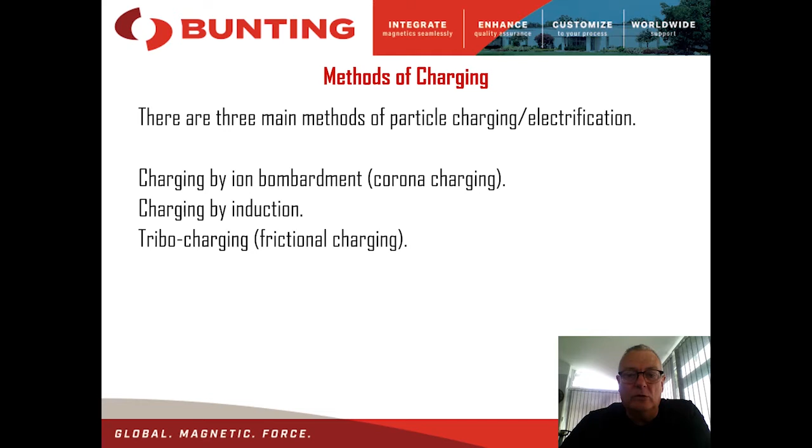Corona charging is induced onto particles in the separator by the use of an electrode, as we see here. That electrode is either positively or negatively charged. In this case, we tend to use positive ions to charge a particle as it comes into the separation area.

So we have positive ions charging our particle, which could be a conductor or a non-conductor, and that particle is carried into the separating area on an earthed roll type unit in this case. The surface of the roll itself is earthed, which allows a separation to be achieved.

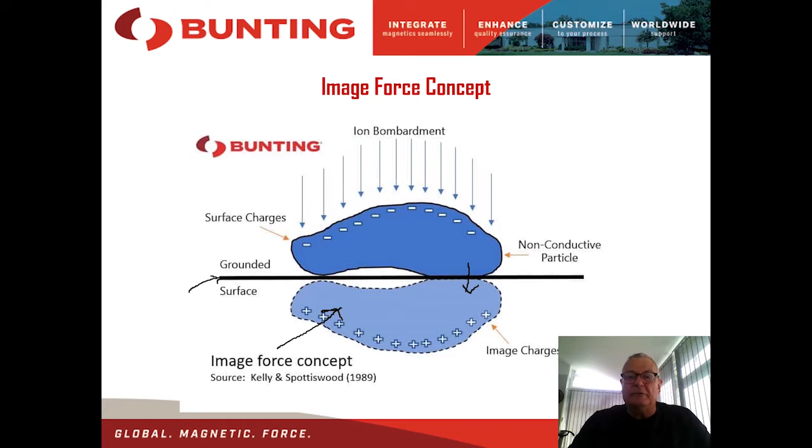That image force is defined by the charge we put on this electrode, and also the conductivity of the particular mineral we're processing. So if it has a low conductivity, the image force will be high, meaning it sticks to the surface all the way around and will be removed by a brush at this point.

If it's a conductor like aluminium or copper, it will instantly lose its charge and be thrown off by the centrifugal force generated by passing over the roll, a function of its mass, its velocity squared, and the radius of the roll. So it's a balance of those forces that allows us to separate a conductor from a non-conducting particle.

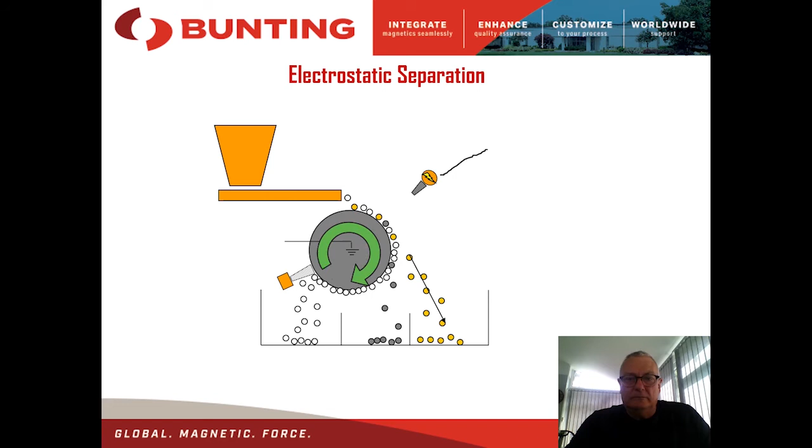So if we look at electrostatic separation in animation, we have our corona electrode here, which will be running at 20 to 30 keV. So it's high voltage, very, very low current.

We feed our material on by a vibratory feeder. The material falls on the roll. I can control the roll speed. The roll is earthed through the bearings.

The yellow particles are conductors, which may be aluminium or copper. We have a middlings fraction here, which may be particles containing both copper and plastic on them. Here we'd have our insulators, which will be something like a very fine granulated cable, the plastic PVC sheathing on the cable itself.

PVC shielding is an insulator. It sticks on the roll because of the image force, and is discharged at this point by a brush system, which aids discharge but also cleans the roll surface before it rolls back in to pick up more feed material.

So really the separating zone of the separator ranges from about here to about here. The material is charged as it drops off the roll, off the vibratory feeder, and it's the sphere of influence where the material is charged in this area here.

I can control the separation efficiency by controlling the roll speed, the splitter plate position, which can be cut in here or here depending on my wishes, and the kV applied to the electrode. Typical kVs run between 20 and 30 kV.

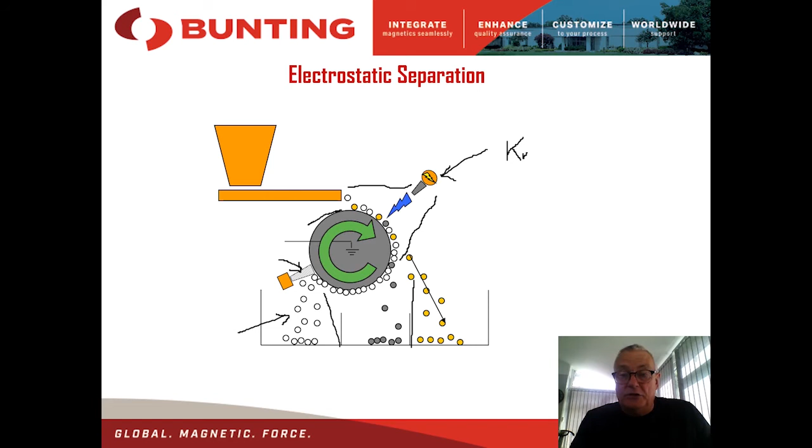So here we see the feed. Always feed via a vibratory feeder to get an even monolayer of material, which gives a more effective separation. We tend to use a stainless steel, earthed roll, because that has the correct conductivity for these applications. The other option would be a titanium roll, to all intents and purposes.

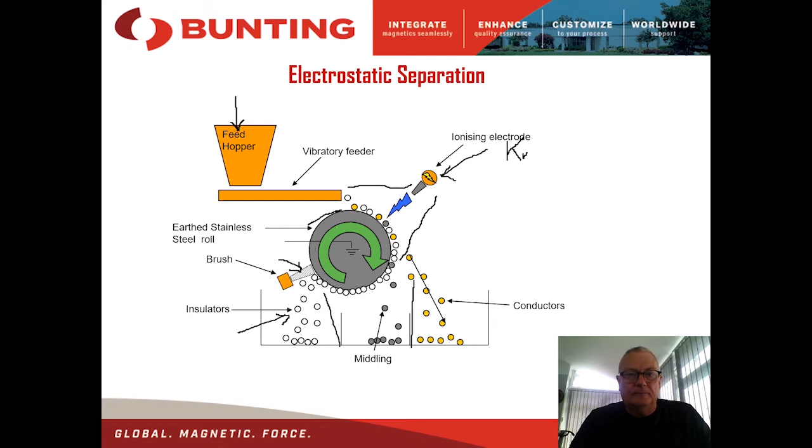So the principle of operation, if we run through this again before looking at some actual applications: we feed a material like a granulated copper cable in a controlled monolayer onto our revolving earth roll. Voltage is applied to the corona discharge electrode, typically tungsten wire, which generates our electrostatic field as the particle drops off the vibratory feeder.

Conducting particles like copper or aluminium instantly lose their charge because they're highly conductive and are thrown off the roll by the imparted centrifugal force.

Insulating particles like plastics will keep their charge due to the image force we discussed earlier, and are pinned to the roll long enough to revolve around into the non-conductor's separating area and be discharged, usually by the brush. Usually that image force is quite strong on an insulating particle.

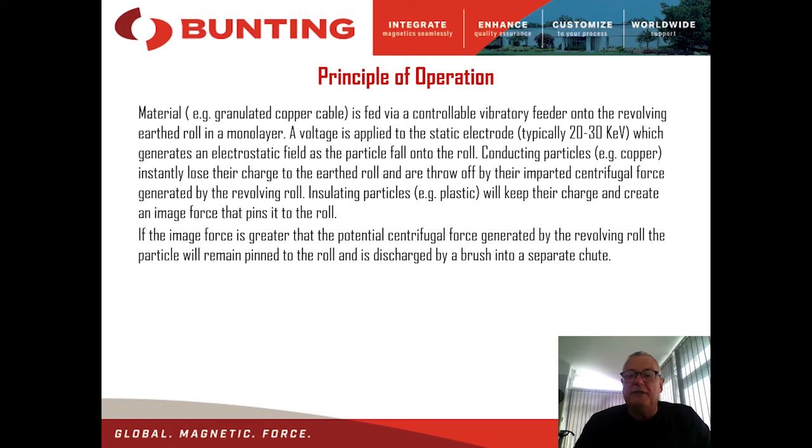So we achieve that separation by the balance of forces between the centrifugal force and the image force itself.

So this is an example of an electrostatic separator manufactured by Bunting's Redditch. Here we have the stainless steel roll itself, and the vibratory feed, which feeds in at this point onto the surface of the roll.

What you can see here are the green areas. There is an electrode that passes across there, which is a tungsten wire electrode.

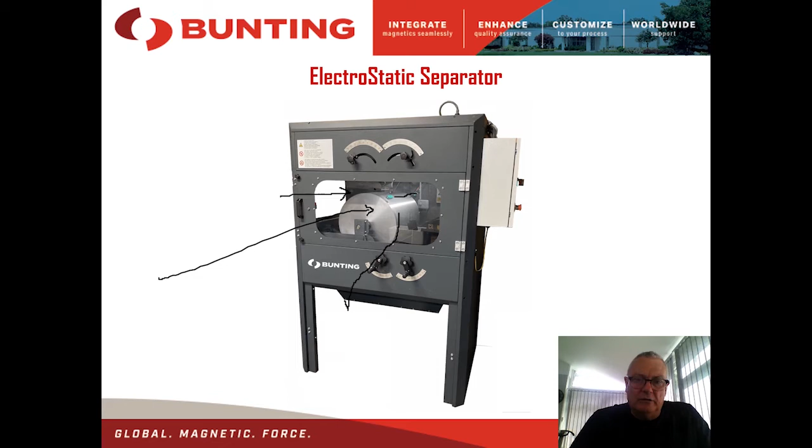As material is fed onto the roll surface by the vibratory feeder, our non-conductors will stick on the roll and discharge into the non-conducting separating area. Our conductors will be thrown and separate off here. We may have a middling fraction which will come off here.

I can control the separation by adjusting the splitter plates, which are here and here, and allow me to cut into the feed as I visually observe the separation taking place.

So my control variables are my roll speed, which is controlled via the panel here, the voltage I apply to my tungsten electrode, which is controlled on this panel here as well, and also my splitter plate position, which is controlled by these two adjustable handles at this point here.

We don't normally vary the electrode position much during the separation process, because it's never good to vary too many variables in an experiment at the same time. We normally set the electrode position to be at about 45 degrees to the feed, however we can adjust that depending on if we need to change the separation. Typically we run at a 45-degree angle, and we're normally probably in the region of 50 millimeters from the surface of the roll, but that can be moved in and out accordingly depending on the particular application.

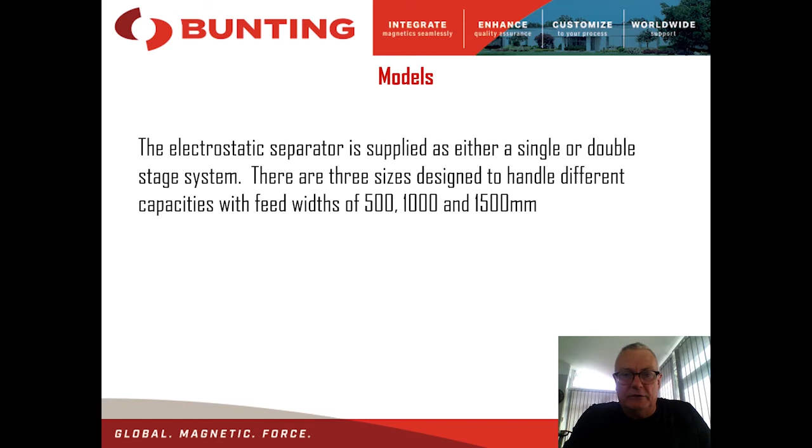We'll come to some capacities a bit later in the talk. So we've got a number of variables - we've got a lot of variables for electrostatic separation.

There are material variables, first of all, which is the particle size range of the material. The separator works in a size range really of plus 45 microns minus 4 millimeters, so it's a reasonably wide size range. The key thing is for scrap recycling applications that it effectively processes and is at its best performance below 2 millimeters in size. So whilst an eddy current performance will often drop off once particles get below 2 millimeters, the electrostatic separation is in its main separating zone. So it acts as another way of separating very fine granulated cable or auto shredder residue, and as a way of recovering valuable materials from a product that previously has been quite difficult to efficiently separate.

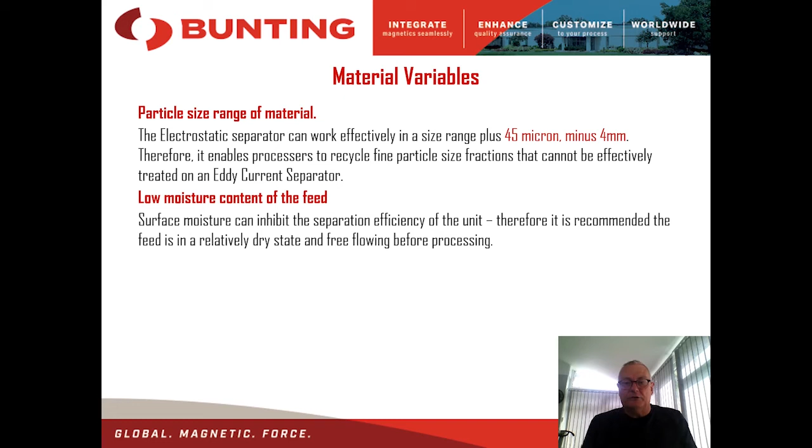Low moisture content in the feed is important, because surface moisture on the particles can mask the material's intrinsic conductivity, so it's important to have low surface moisture and a free-flowing material. That doesn't mean it has to be thermally dried - it just means it can't be a damp material that you're putting through. Otherwise, your non-conducting material will actually perform like a conducting material, because the layer of surface moisture renders it conductive, as it were.

As with all physical separations, the closer the size particle classification that you produce from screening, the better the separation efficiency you're going to get, because it allows us to optimize the separating conditions for a tight size range. This means the centrifugal force generated by the upper and lower band of the size range will be pretty much identical, which means we can optimize the splitter plate position and the roll speed and achieve maximum recovery and grade of the material.

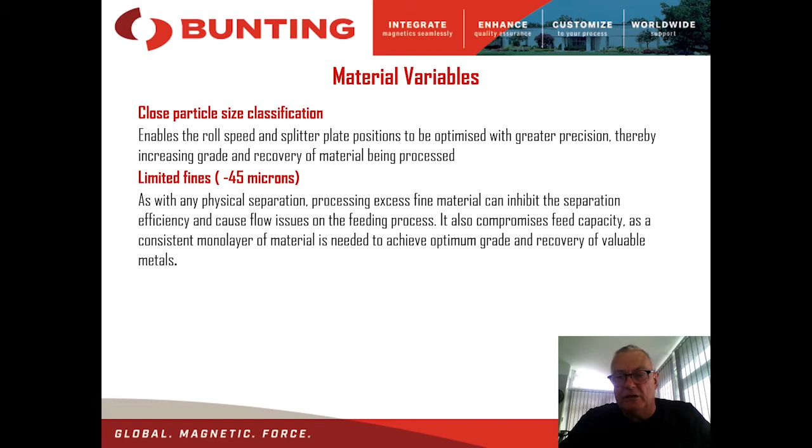The final factor is limiting the amount of fines in the product. Minus 45 micron material tends to generate a lot of dust in the separating zone, which is not a good thing. It also tends to stick on the roll surface and be more difficult to discharge, so it's always good to dedust the material and remove those fines prior to electrostatic processing. That's no different from most physical processing techniques like magnetic separation or air tabling as well.

Machine variables are possibly more complex than a typical magnetic separation, because you have more things to alter. First of all, the applied voltage - for most recycling and mineral applications, we typically run at an applied voltage of 20 to 30 keV. If I'm doing a test on a material I've not run before, I normally set it at 25 keV and see how it performs, then adjust accordingly afterwards.

Separation control can be achieved by changing the applied voltage. If I start at 20 and don't get enough of the insulating material removed, I will raise the voltage to 30 keV. More material would stick, more of the middling fraction will stick as well, which will give me a cleaner conductor's material. So we can alter that variable. That's probably the first thing to think about changing.

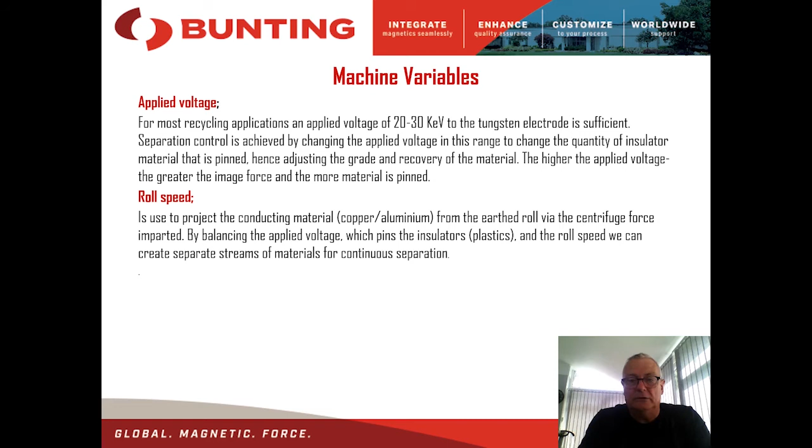Roll speed can be used to project more of your conductors further. So if you're losing too much conducting material into your insulators, because they may be non-liberated particles or something, a way of getting over that is to increase the roll speed and get more of that material, get the centrifugal force greater than the image force, and separate that way. Higher roll speed also allows you to process a greater volume per meter per hour from the material.

Splitter plate position, again, we look at it like a magnetic separation application. We look at the splitter plate position and can cut accordingly depending on the discharge arc of the conductors and how high the pinning force is on our insulators, and move those accordingly.

Low humidity atmospheric conditions - it's always good to have a relatively low humidity in the separating void of the electrostatic separator. So for applications in countries with high temperature and high relative humidity, the machine can be manufactured with heaters inside the separation cavity that will help control that and bring the relative humidity down.

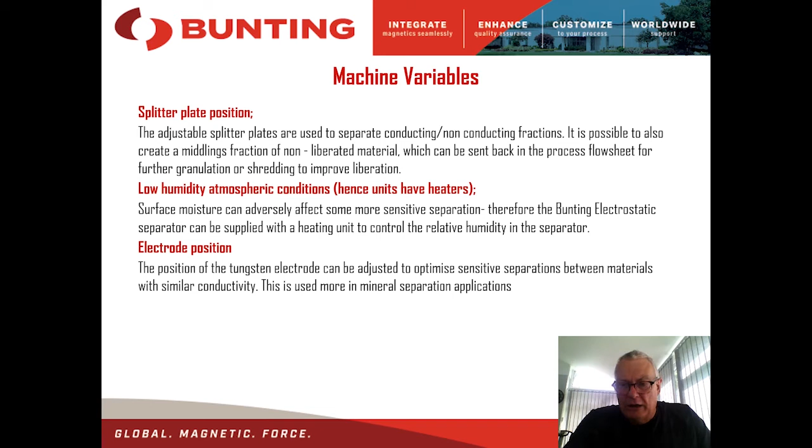Electrode position is the final separating variable that can be moved to influence the discharge pattern of the conductors and the insulating materials. That tends to be used as a last of these options in the separation process. Normally, as I said before, we operate at about a 45-degree angle from the perpendicular as a starting point.

So applications, mineral processing, where they are used in conjunction with high intensity magnetic separators in separating complex materials like beach sand deposits, which may contain paramagnetic minerals such as ilmenite, chromite, monazite and garnet, but also non-magnetic minerals such as zircon, silica sand and rutile. Those three have different conductivities - rutile tends to be quite conductive, the silica sand non-conductive. So you can obtain a separation between those two products. The rutile is a high value material that goes for titanium dioxide manufacture, so it's worth recovering - it has a high value per ton. This gives us the option of putting it through a separating flow sheet and obtaining better separation of some of the non-magnetic phases from a beach sand operation.

Shredded waste electrical product or auto shredder residue, material below 2 millimeters in size, can be processed over these sorts of machines to obtain a conductor, non-conductor separation. Food separations as well - these machines were often known as tea separators because they were used to separate the stalk of a tea leaf from the actual leaf itself, because one is a conductor and one is a non-conductor. It's a way of automating that sorting process.

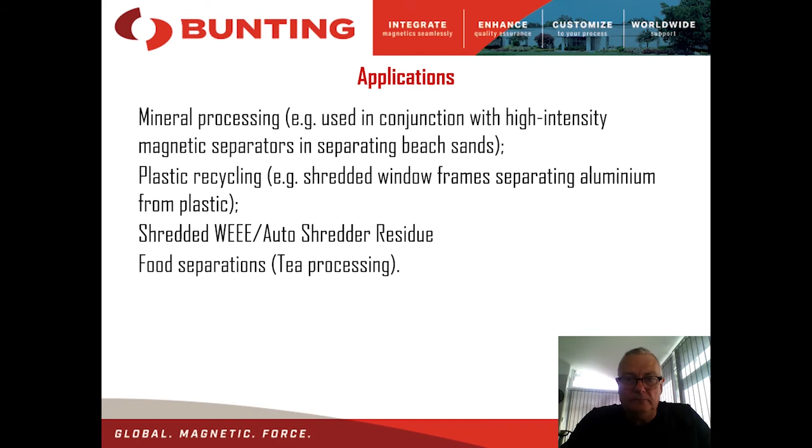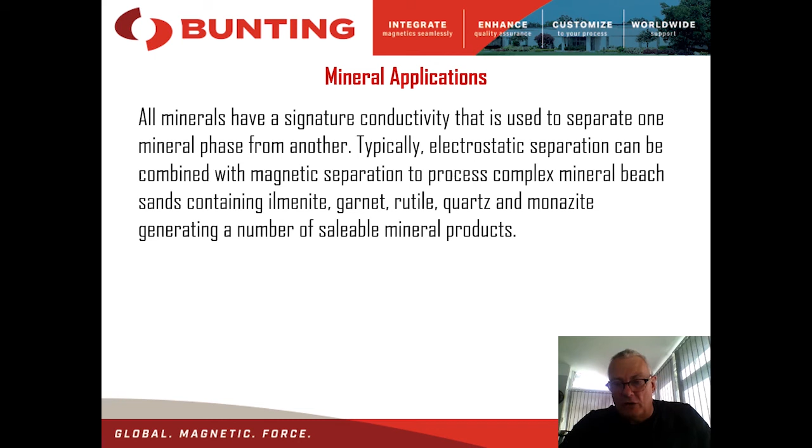If we talk a bit about mineral applications, all minerals have a signature conductivity, providing their relative humidity and the surface humidity is low enough. Electrostatic separation is used to separate out conductive minerals from non-conductive minerals in a number of applications.

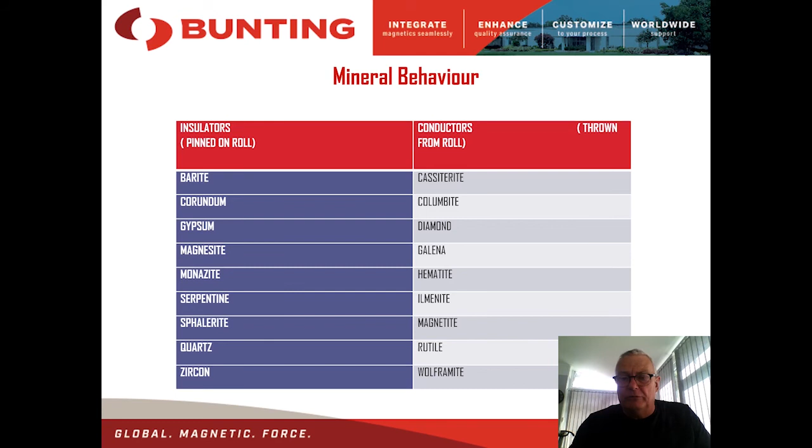If you look at the conductors and insulators for scrap applications, these are pretty much more clear cut, where we have materials like aluminium and copper, zinc, silver and gold, and platinum group metals particularly, which are conductive in nature. Our insulators are materials like plastic, glass and stone, fibres from circuit boards, etc. Ceramic capacitors from car shredding, car engines and things, and rubber are insulating materials. So separations are possible from those.

It is also possible to separate conductors from conductors, as it were, if there's a significant difference in conductivity between one and the other. For example, aluminium and copper - it is possible to separate out the two products simply by a difference in conductivity. One is more conductive than the other, and by setting the machine up correctly at a relatively low kV, we can separate one from the other, should you wish to.

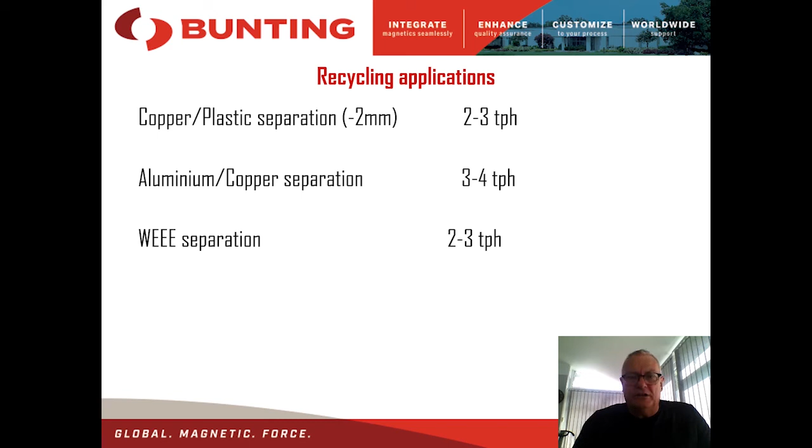Typical recycling applications, capacities per meter width of electrostatic roll: copper-plastic separation, maybe for granulated cable, 2 to 3 tons per hour. Aluminium-copper separation, 3 to 4 tons per hour, because we don't have the plastic there, we've got a denser material. WEEE separations, waste electrical product separations, 2 to 3 tons per hour. So reasonable capacities per meter wide unit.

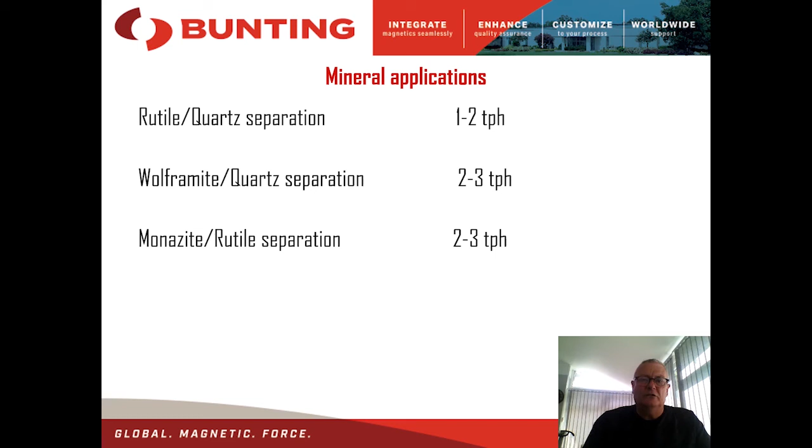So an example of a separation. This is a copper-aluminium separation that we have run on a machine. This machine is in the laboratory at the University of Birmingham, but is similar in design to the one made by Buntings. We'll have a look at the separation of this.

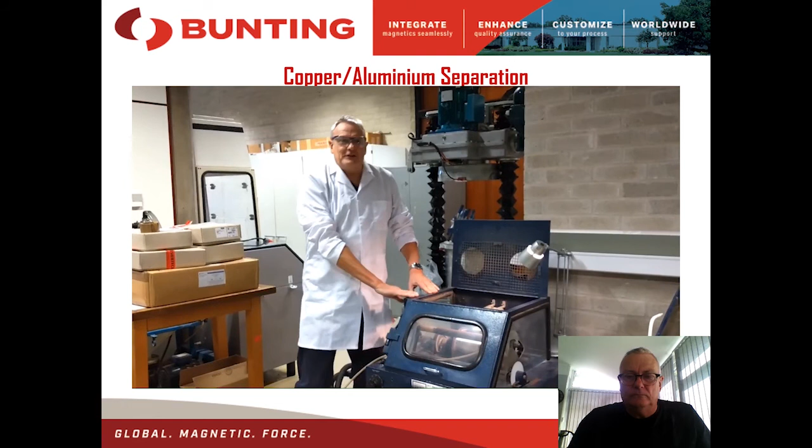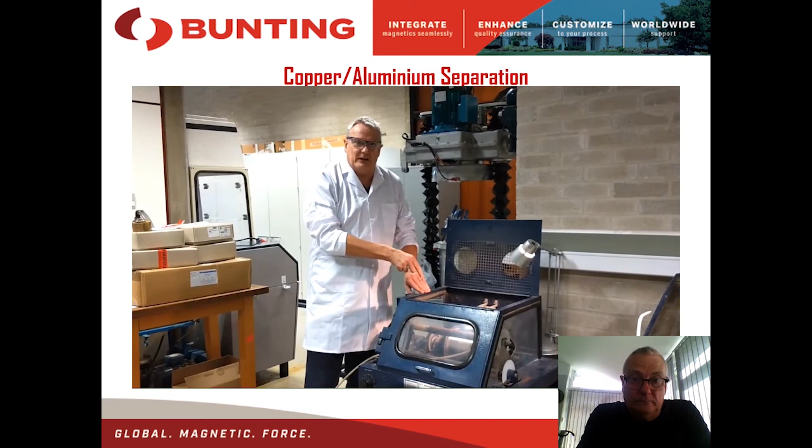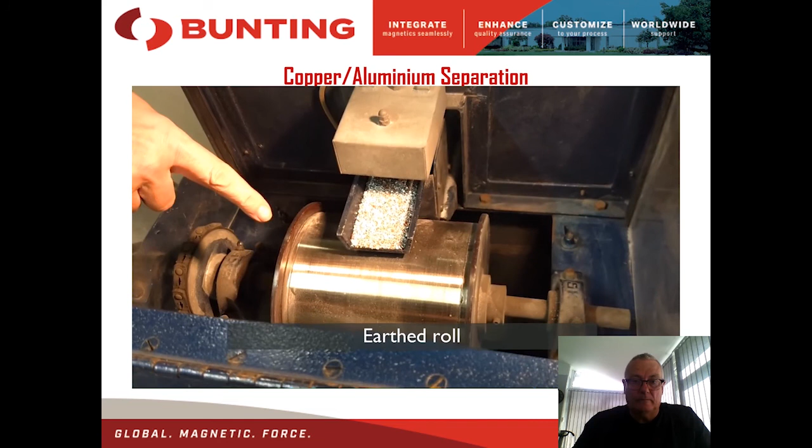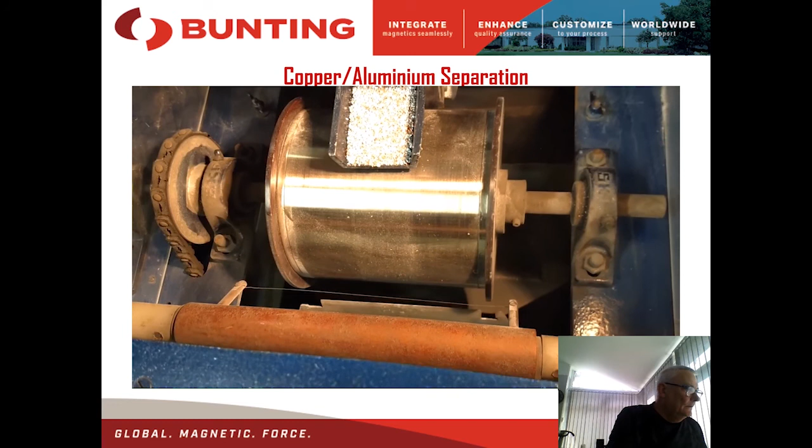This is a physical separator used for the separation of materials of different conductivity. This is what's called an electrostatic or high tension roll separator, and is used a lot in the mineral processing and metal recycling industry. If you zoom in on the roll, you'll see we have an earthed roll with a titanium face upon it, and we also have the wire there - a high tension corona discharge system, which puts through about 20,000 V through it. Our feed material for this particular demonstration is a 50-50 mixture of copper and aluminium.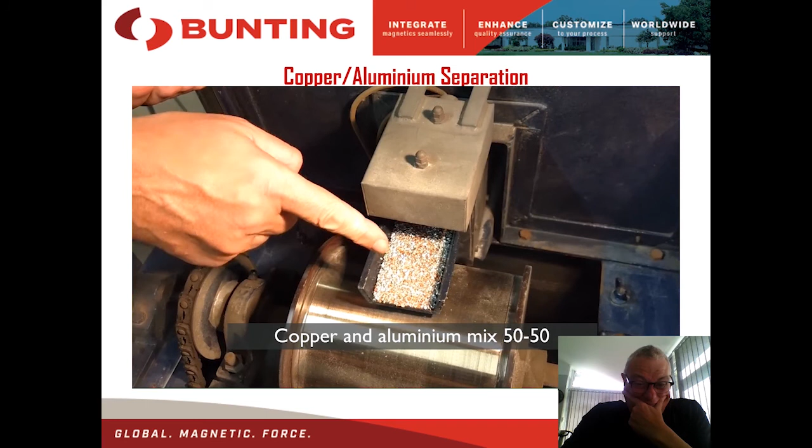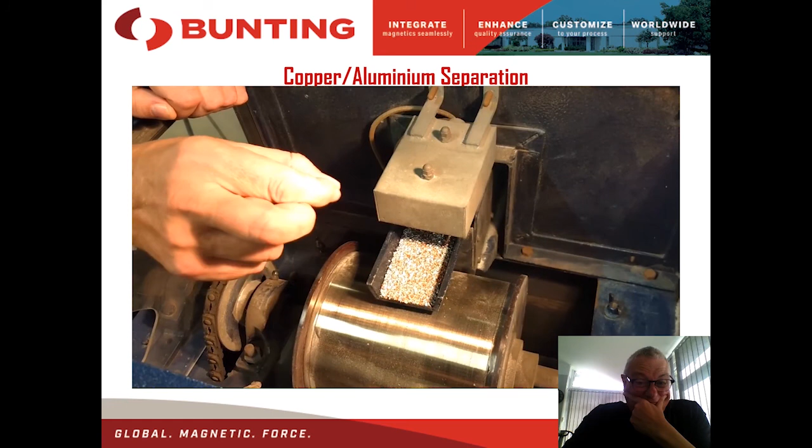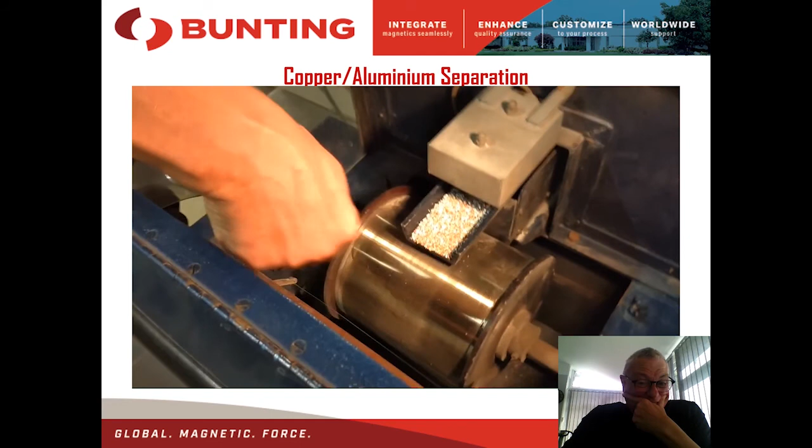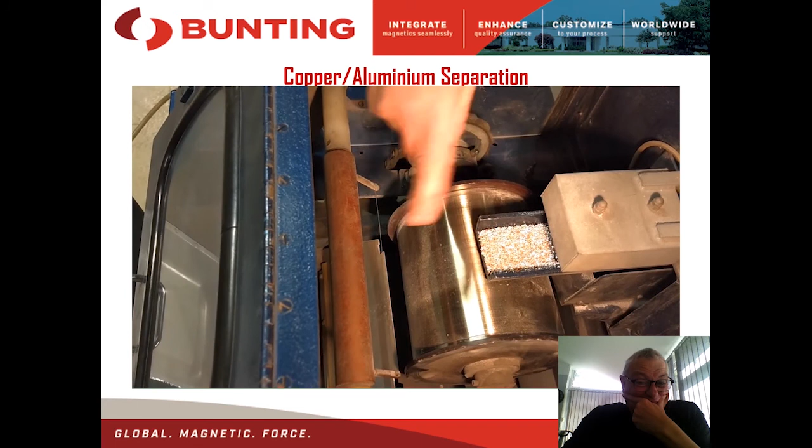What I'm going to try to do is separate the material based upon their individual conductivities. The aluminium has slightly less conductivity than the copper. What will happen is when I pass it off the vibratory feeder onto the roll, the particles will be charged by the corona discharge system here. When they hit the earth roll, the material that has the highest conductivity will discharge its charge quicker to the roll and be thrown off by its own centrifugal force, and material that is less conductive will keep what's called an image force on the roll surface and be attached to the roll and be discharged around the other side of that splitter plate there.

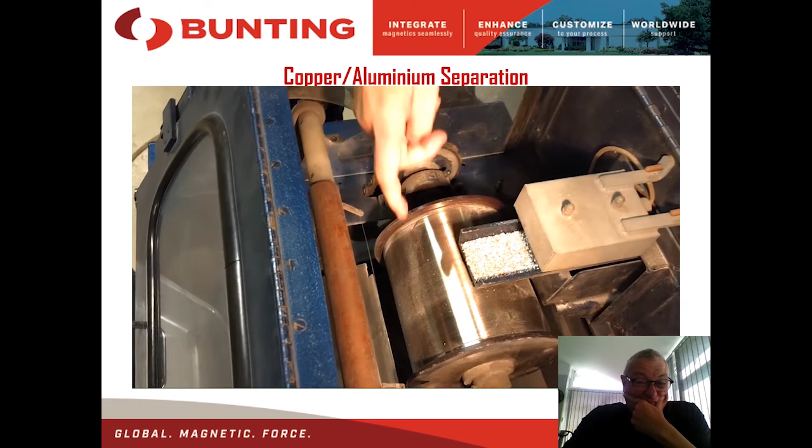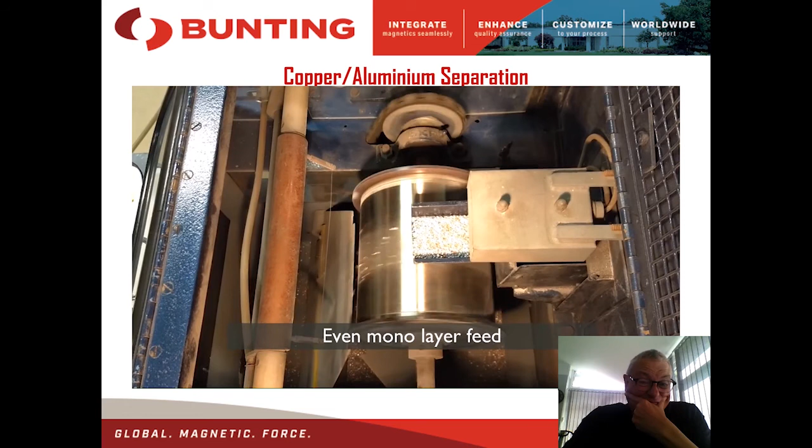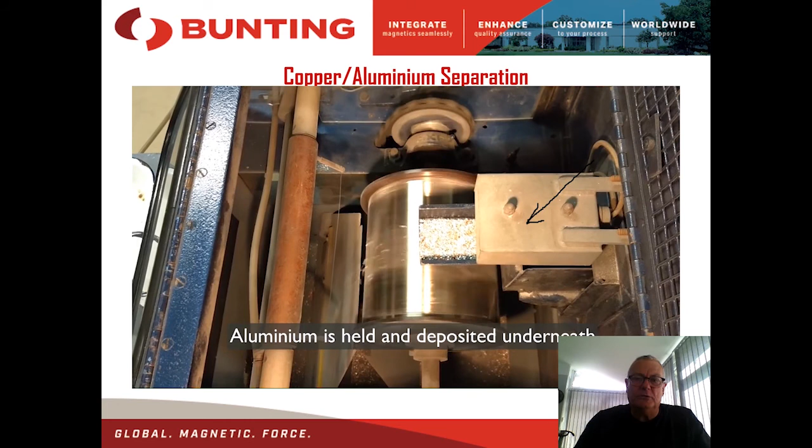This material is probably about 1 millimeter down to about 500 microns. Wouldn't be separated on an eddy current separator. Here you can see, in this case, we have the heater situated above the vibrator feeder. It's not always the case that you need that. So we've got a relatively slow speed and slow feed rate.

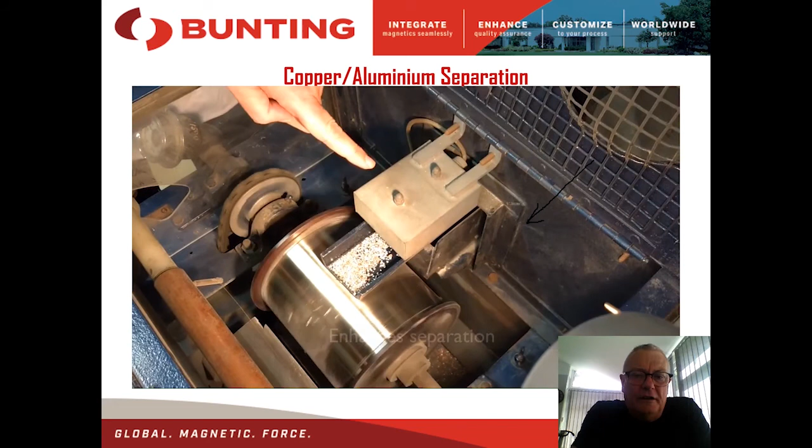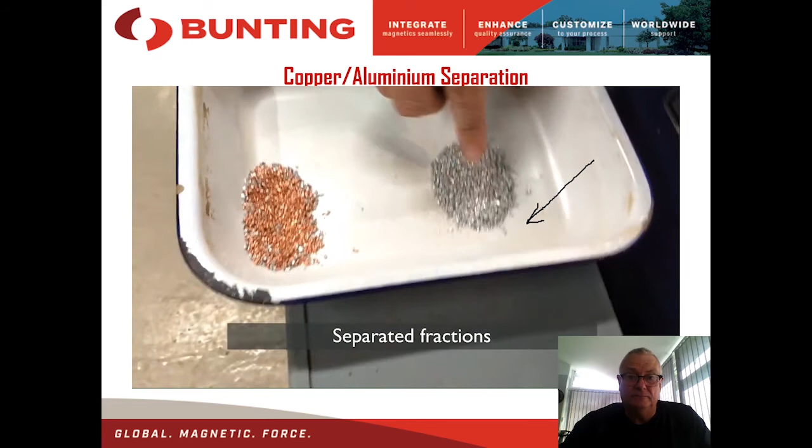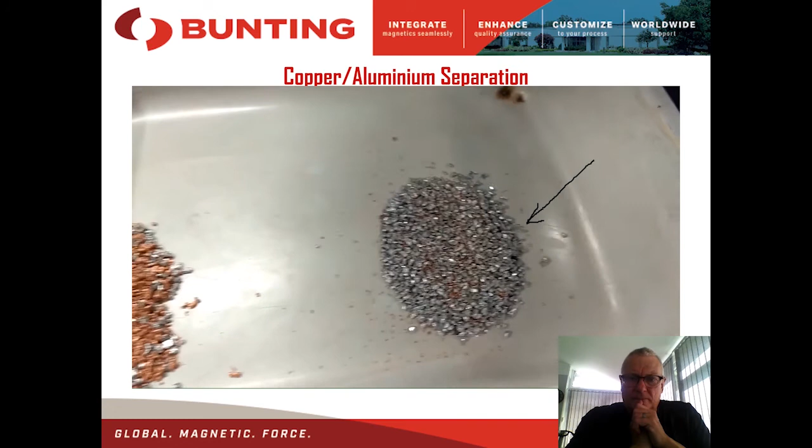The fractions that we have from this test are in the tray here. We have, for the sake of the test, the non-conductors, which are here, which you can see are predominantly aluminium with a tiny bit of copper fines within that material. So it needs closer size classification to get a perfect separation on that. And we have our copper here, which was thrown from the roll because it has more conductivity.

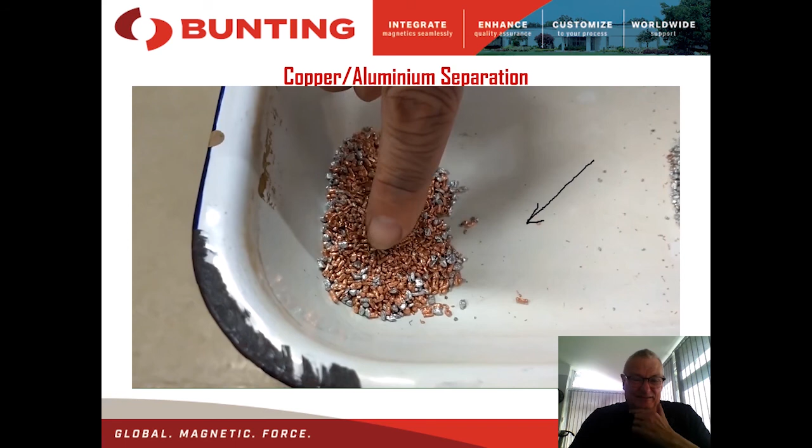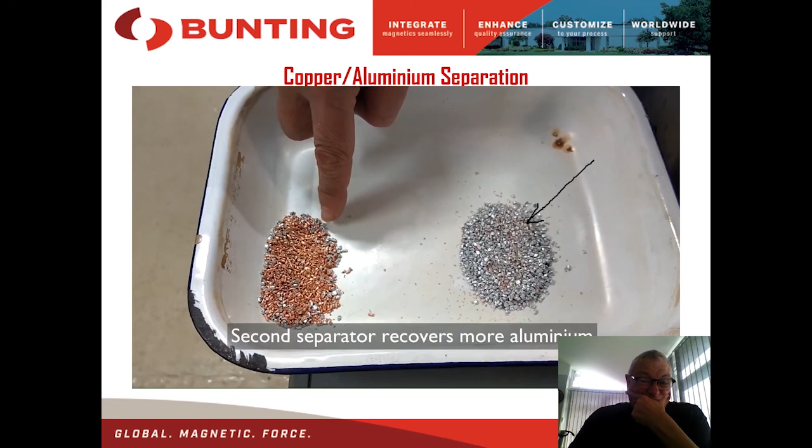There we have some aluminium in there, but that's a larger size range. So again, if I screened it at a slightly different size range, I'd be able to get an effective separation between the copper and the aluminium. What these would then go to is a second separator, an electrostatic separator, which would recover some more of the aluminium to give you a final product that would be 98 to 99% pure metal.

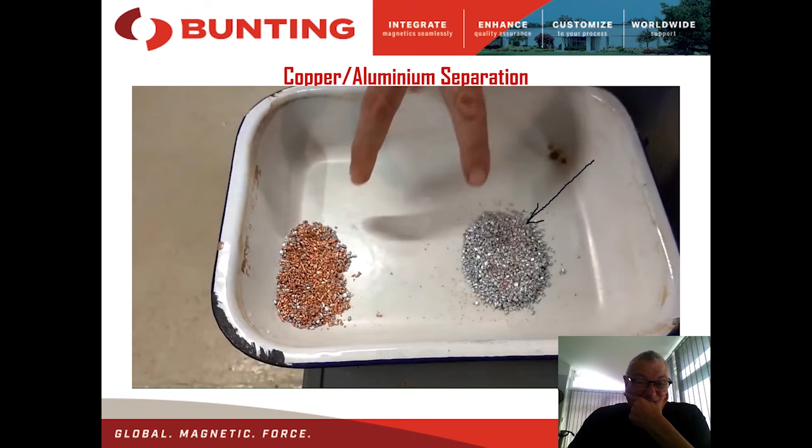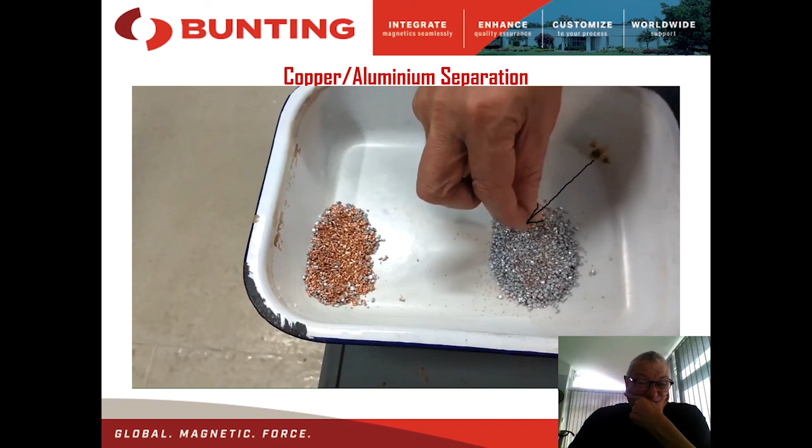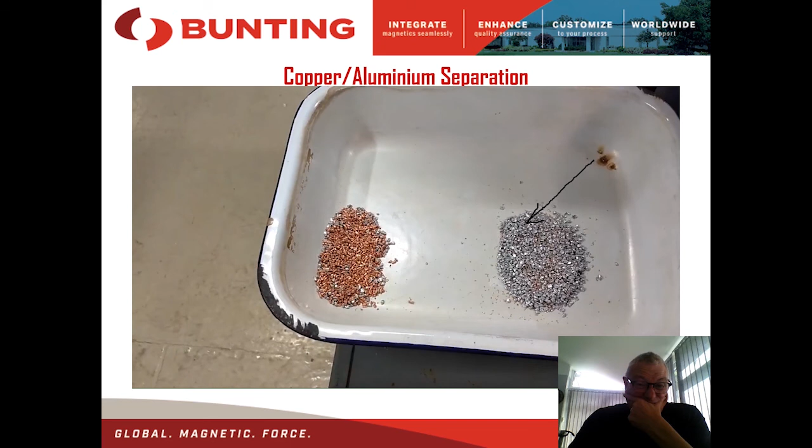So a simple way of processing material that is too small for an eddy current separator, but instead of being a mixed conductor fraction, which this was 50-50 to begin with, after one pass I've got a pretty good aluminium concentrate. I've got a copper concentrate here that can be further processed for upgrading using a simple roll separator in a dry process, which will take, you know, a metre wide unit will take 3 to 4 tonnes per hour of material for processing.

So again, just to confirm that we can use our electrostatic separator to separate out material that is conductive and non-conductive. That's a relatively easy separation, but we can also use it to separate a conducting metal from a conducting metal based upon their relative conductivities. So something that you may consider two highly conductive metals can be separated because they have a difference in conductivity, as it were.